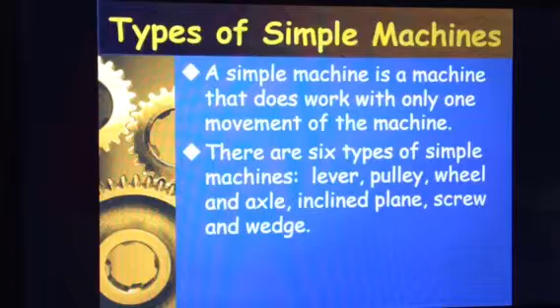They're levers, pulleys, wheel and axles, inclined planes, and screws and wedges. Now we are going to be doing labs later this week where you're going to be utilizing these different ideas and the equations from the 2 previous sections, so don't forget those. And here's an example of a pulley.

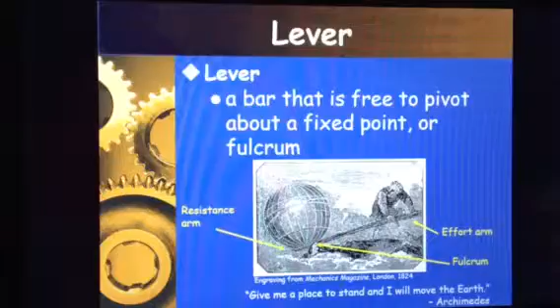This is showing that you can move this with one movement. Now note, your effort is downward, but your force is upward. So we have an ideal mechanical advantage for this because we're talking about a frictionless, hopefully ideal machine. And the MA would increase — the MA greater than 1 increases the force.

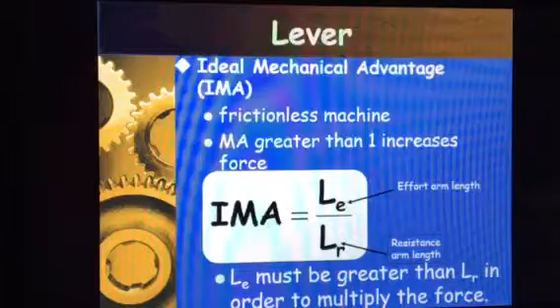So here we have the L E over the L R. So E is the effort arm length and R is the resistance arm length. You can write this onto your equation sheet. The LE must be greater than the LR in order for it to multiply the force. So we want to make sure that you understand that your effort arm length does depend on how far you can lift something. The heavier an object is, the more length you have to have in the effort arm.

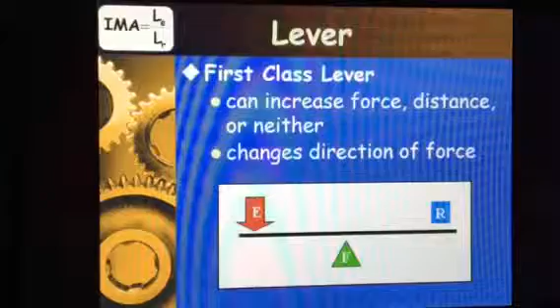So we have 3 different classes of levers. Let's talk about the first class lever. In a first class lever, you are going to have a fulcrum between your effort and your resistance. The fulcrum is in the center. So basically, in this case, we can increase the force, distance, or neither. And we can change the direction of the force. So as you push the effort force down, the resistance force will go up.

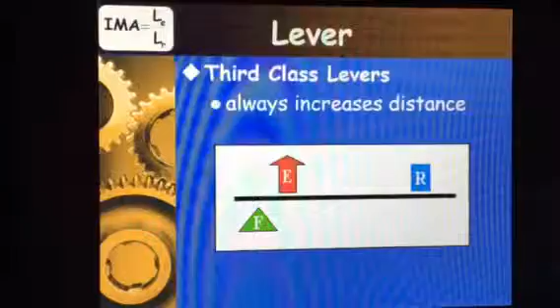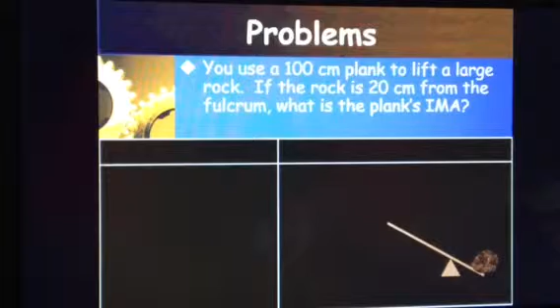So let's go through some problems for levers. If you use a 100 centimeter plank to lift a large rock, the rock is 20 centimeters from the fulcrum, and the plank — what is the plank's IMA? So there is our little diagram at the bottom for that.

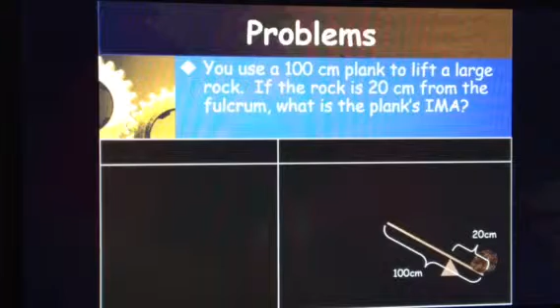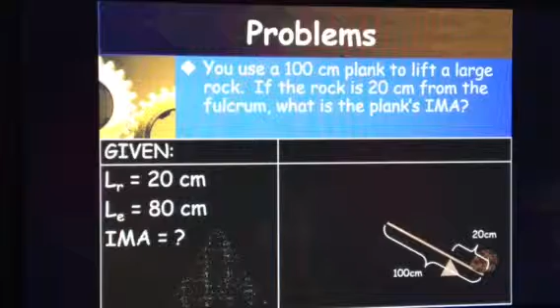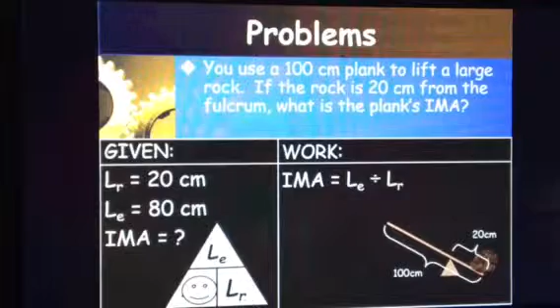So what are we given? We are given the resistance length, which is 20 centimeters. We are given the effort length, which is 80 centimeters, and we need to find the ideal mechanical advantage. So now that we know what we're given, you guys can go ahead and solve this problem. You want to use the equation for IMA of length effort divided by length resistance. And so it would be 80 divided by 20. And in this case, you get an IMA of 4.

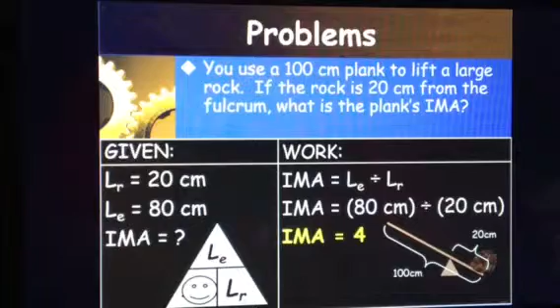So now let's talk about pulleys. We have 3 types of pulleys, but a pulley is a grooved wheel with a rope or chain running through it. We have our flexible first class levers. We also have our pulleys.

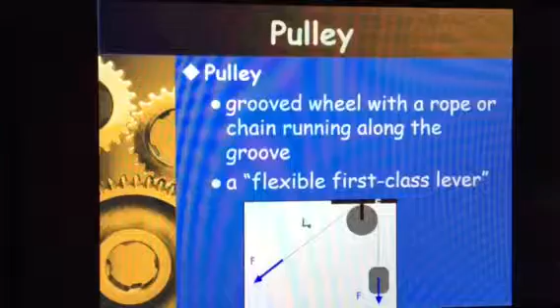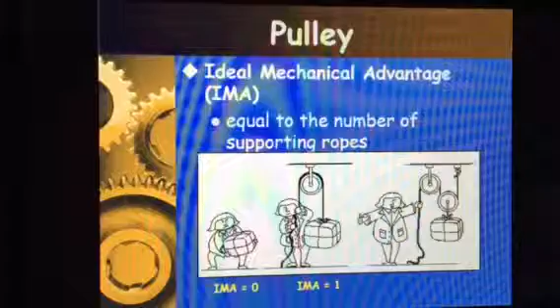And so you're going to see here that we have our force being applied in 2 different ways. You have an LE, which is your effort force, and then an LR, which is your length resistance as well. So ideal mechanical advantage for a pulley is equal to the number of ropes that support it. So your IMA in this case would be — then we have 1 because we have 1 rope. And in this case we would have 2 ropes.

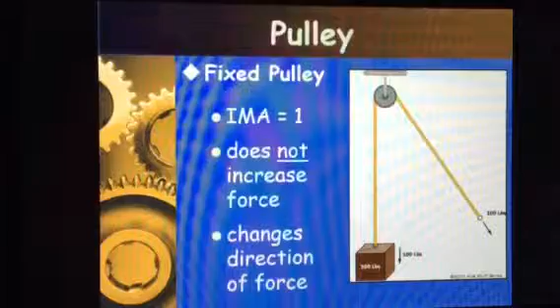So the first type is a fixed pulley. Its IMA is 1. It does not increase force, and it changes the direction of the force. So you can see it has one attached point to a block at the bottom, and then you're going to have a fixed pulley hooked to something, say a ceiling, and you're going to pull on the opposite end, and that's where your effort force is going to come from.

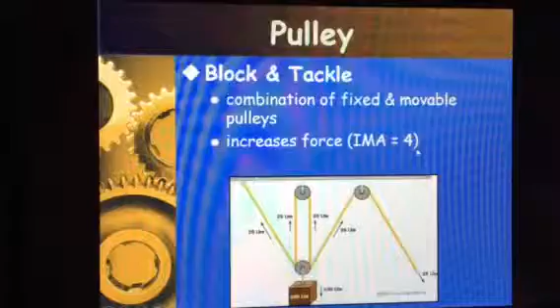We have a block and tackle pulley system. This is a combination of fixed and movable pulleys. The fixed pulleys are the two here, one here and one here, with a movable pulley down here. This one will actually move as you go through. In this case, it has an increased IMA of 4 because it has 4 ropes. It may or may not change direction.

Then we have a block and tackle pulley system. Block and tackle is shown with 4 as the ideal mechanical advantage.

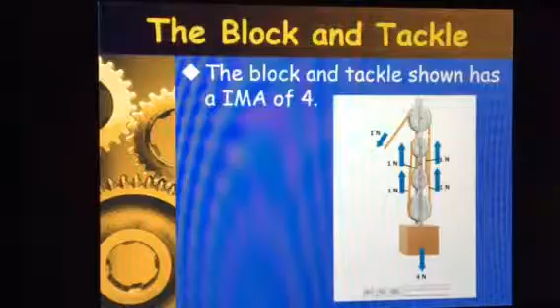With a block and tackle system, you're typically going to have a series of 3 to 4 pulleys within a system together. Then we have a movable pulley.

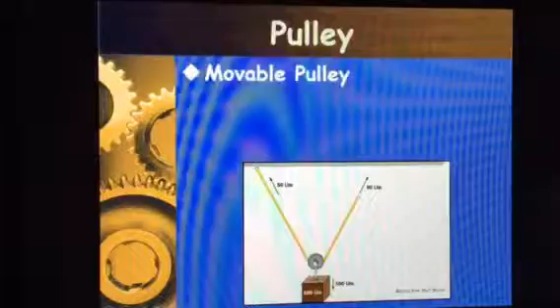Note that you have your rope attached to a ceiling. Your pulley is going to be attached to your weight, and you're going to be having an effort force in the opposite direction. This is an IMA of 2, and you have multiple forces. It does not change the direction of the force.

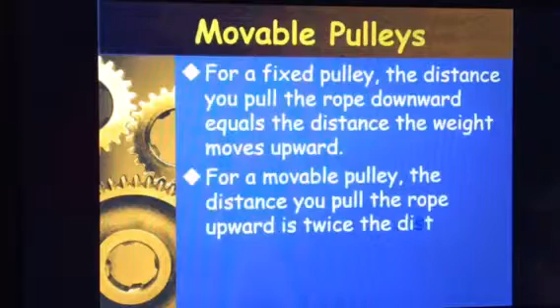So for fixed pulleys, the distance you pull the rope downward equals the distance the weight will move upward. For a movable pulley, the distance you pull the rope upward is twice the distance the weight will move upward.

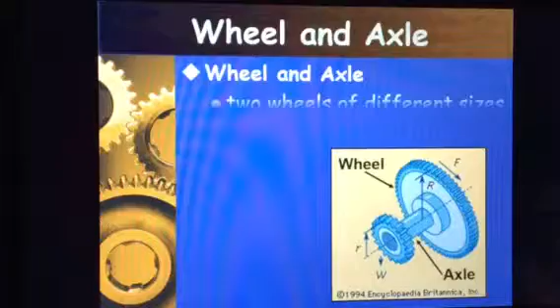Then we have wheels and axles. A wheel and axle, like in your car, we have 2 wheels with different sizes that rotate together, and they rotate because of a rotating lever called an axle.

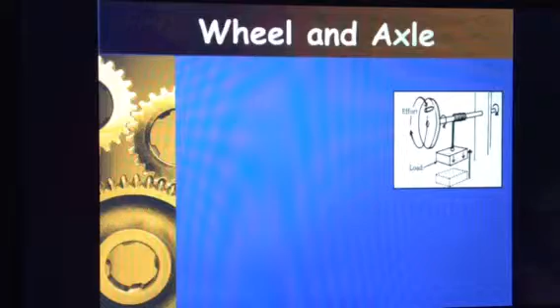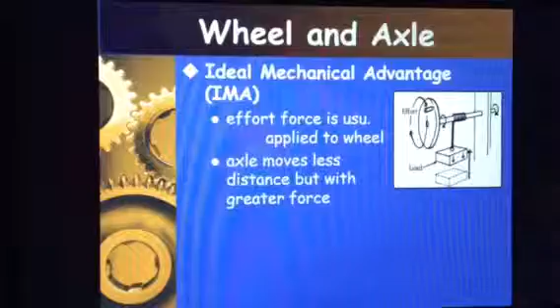The ideal mechanical advantage: the effort force is usually applied to the wheel. The axle moves less distance but with greater force. Here's the equation that you need to put down for your ideal mechanical advantage.

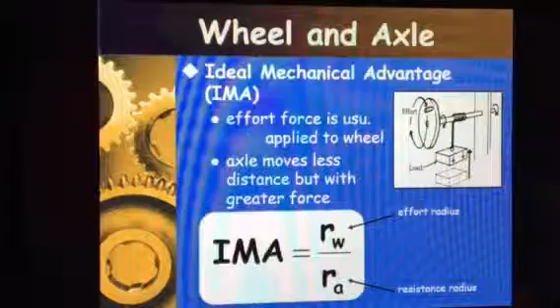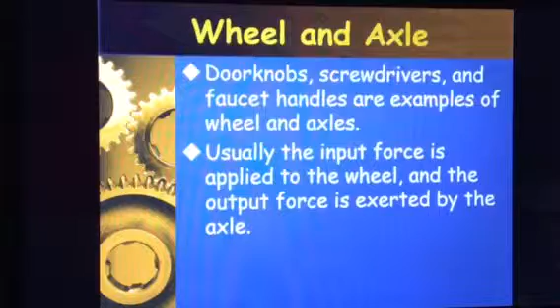So doorknobs, screwdrivers, faucets are all examples of wheel and axles. Usually the input force is applied to a wheel and the output force is exerted by the axle. A wheel and axle is really just a modified lever.

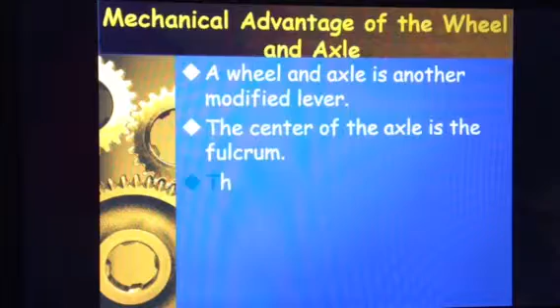The center of an axle is known as a fulcrum. The input force is applied to the rim of the wheel, so the length of the input arm is the radius of the wheel. Then we have an inclined plane.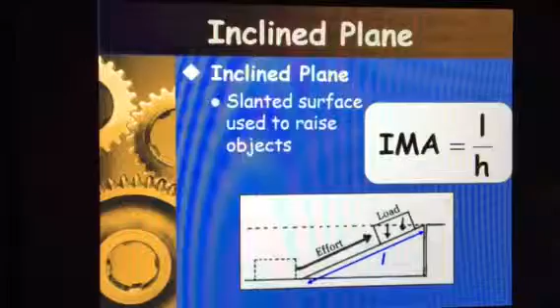You can write this onto your equation sheet as well. Your ideal mechanical advantage is your length over your height. An inclined plane is a slanted surface used to help raise an object. So there is your length, and there's your height.

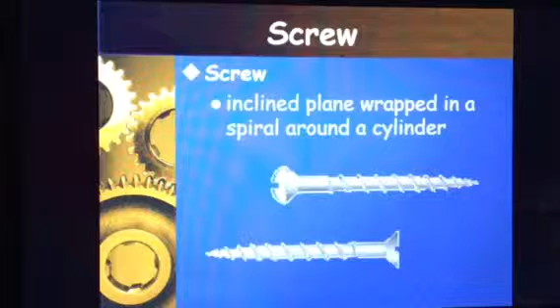Then we have a screw. A screw is simply an inclined plane wrapped in a spiral around the cylinder. The ideal mechanical advantage of a screw is related to the spacing of the threads.

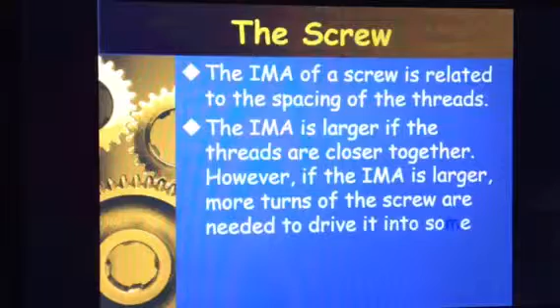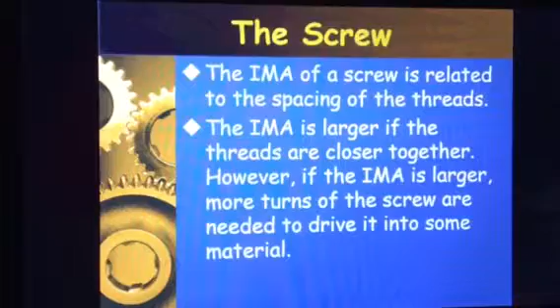The ideal mechanical advantage is larger if the threads are closer together. However, if the ideal mechanical advantage is larger, more turns of the screw are needed to drive the same screw into a piece of material. That is also why drills become very handy for this instead of just screwdrivers.

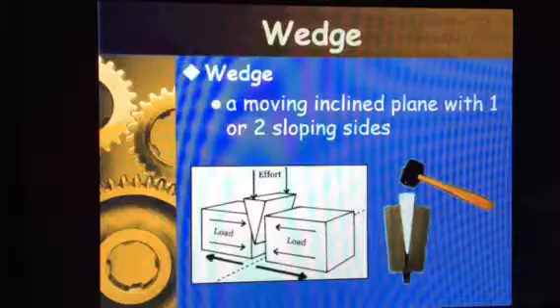The next one is a wedge. A wedge is really a type of inclined plane with one or two slopes. And you can see here you have an effort force being applied to a load.

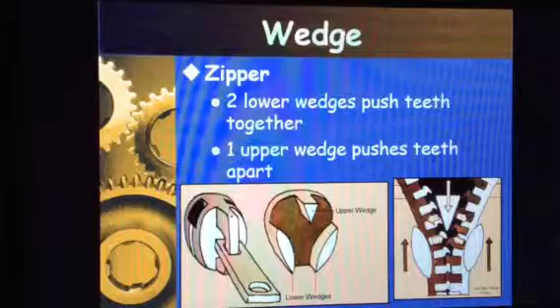We also have a zipper. These are 2 lower wedges pushing teeth together and 1 upper wedge pushing teeth apart. And so it allows for you to put things together and pull them apart.

Then we have compound machines. A compound machine is 2 or more simple machines that operate together to form this compound. A car is an example of a compound machine.

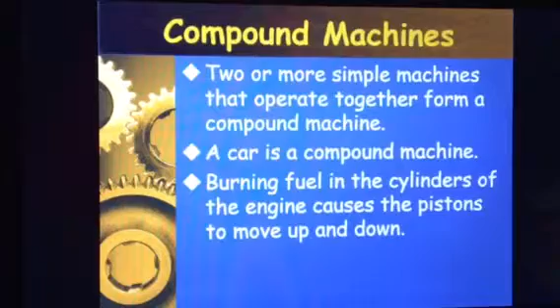You have burning fuel in the cylinders that cause the engine to have pistons that move up and down, which then allow for the wheel and axles to have motion to go forward. And the up and down motion makes the crankshaft move.

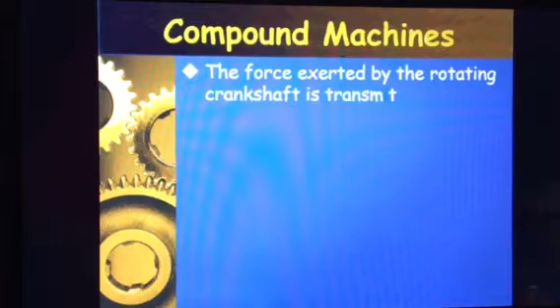The force exerted by the rotating crankshaft goes to the wheels through other parts of the car, such as the transmission and the differential. Both of these parts contain gears. They can help change the rate at which the wheels are rotating, the force exerted by the wheels, and even reversing the direction of rotation of the wheels, causing you to go in reverse.